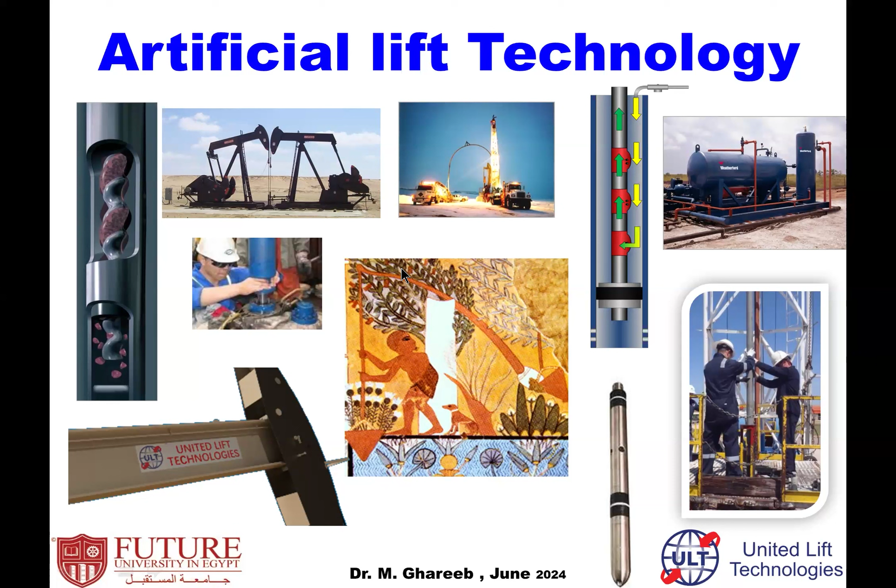So, without further ado, let's welcome Dr. Mohamed Ghareeb, who will give us a session on artificial lift technology. Dr. Mohamed has a PhD in petroleum production engineering with a specialty in artificial lift and production engineering and operation. He is currently a staff member of Future University and head of the Petroleum Technology Department of New Cairo Technological University. Meanwhile, he is global technical director of Artificial Lift Systems for United Lift Technologies.

Dr. Ghareeb is a technical and business professional with over 34 years experience in the oil and gas industry, with long experience of business development, sales, marketing, operation, teaching and applications engineering covering artificial lift design, operation, troubleshooting and optimization for major service companies like Lufkin, GE, Tundra Process Solutions, Weatherford, United Lift Technologies, and oil field operation for major operators like Eni, Agiba, GPC.

Dr. Mohamed Ghareeb's field experience includes the setup, installation, operation, and optimization of different forms of artificial lift systems in the Middle East, North Africa, Russia, Romania, Turkey, and Brunei. Over the past years, Dr. Mohamed also has played a major role in the practical training for field staff and engineers in oil and gas production engineering and well operations for different major companies in the MENA region, USA, Canada, Romania, Turkey, and the Far East. Dr. Mohamed was Society of Petroleum Engineers SPE Egyptian Section President, Program and Membership Chairperson.

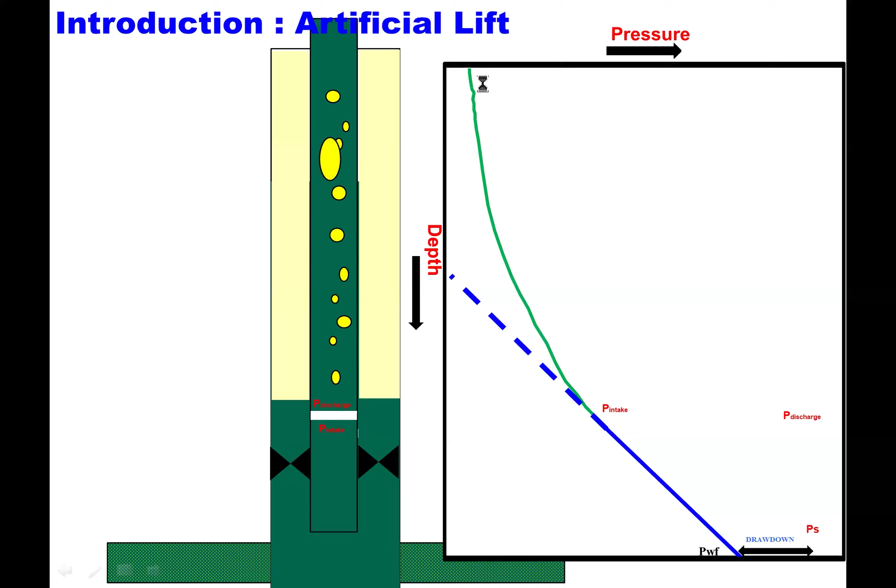What's available in the market for making this type of artificial pressure inside the wells? In all cases, as I said, there is an artificial pressure inside the well. All any artificial lift system is doing is generating artificial pressure inside the well. According to current applications worldwide and the energy source, they are divided into two categories.

One is called formation pressure assist, assisting the formation pressure. The formation pressure is low, so I'm assisting the bottom hole flowing pressure inside the well, and I'm reducing the hydrostatic head inside the well, or gas assist, whatever we have. There is no pump used in this type of artificial lift; it is just formation pressure assist or gas assist.

Plus, there are different types of what we call mechanical assist. In mechanical assist, I have to run a mechanical device inside the well. There are different techniques, either electric, hydraulic, or mechanical drive, and this can give me the target required artificial pressure inside the well.

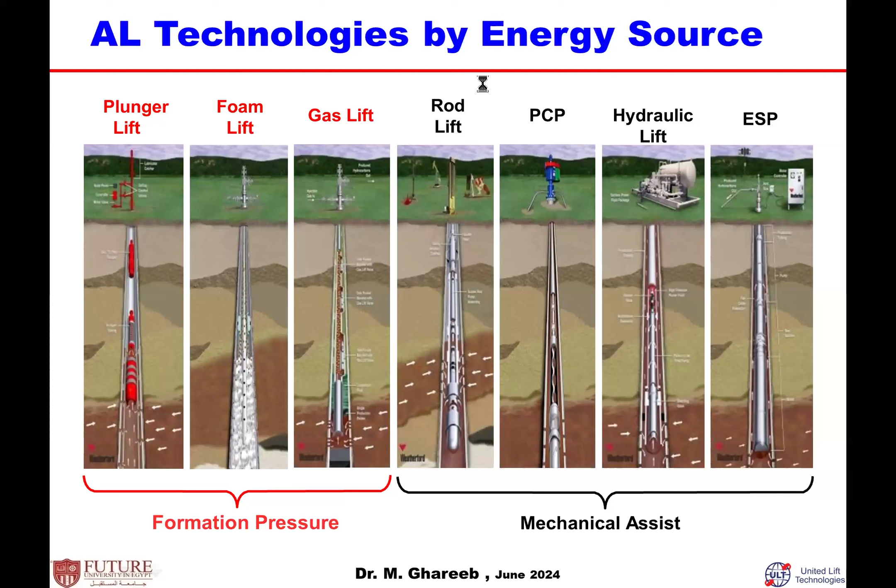For formation assist or gas assist, the market currently uses plunger lift, foam assist or foam lift, gas lift, and so on. Each one has different categories and applications. For mechanical assist, we have rod lift, PCP, and hydraulic lift; there are different types of hydraulic lift. PCP is the abbreviation for progressive cavity pumping system. Plus ESP, electrical submersible pumping system, and so on.

Then, based on what we mentioned before, to decide what type of artificial lift I must use, or which is suitable for my well, I have to know what I need from my artificial lift, what I want from the artificial lift system I have to run in the well.

Remember, when we run an artificial lift system in the well, most operators prefer to run a system for the life of the well, because changing artificial lift is not easy. It can be done, but it's not preferred. If you find a system that can run from beginning to end, that's okay. However, different types of reservoirs and wells sometimes require changing the artificial lift during the life of the well.

Then I need artificial lift to maximize production. My main target is to maximize production, and meanwhile to be flexible in production rate. Remember, there are different types of reservoirs, like water drive, gas drive, depletion drive, so production rates can change with time. Even if the well is under enhanced oil recovery or secondary recovery, the production rate can change. So I need a type of artificial lift where I can easily change the parameters to cope with changes in the well production rate.

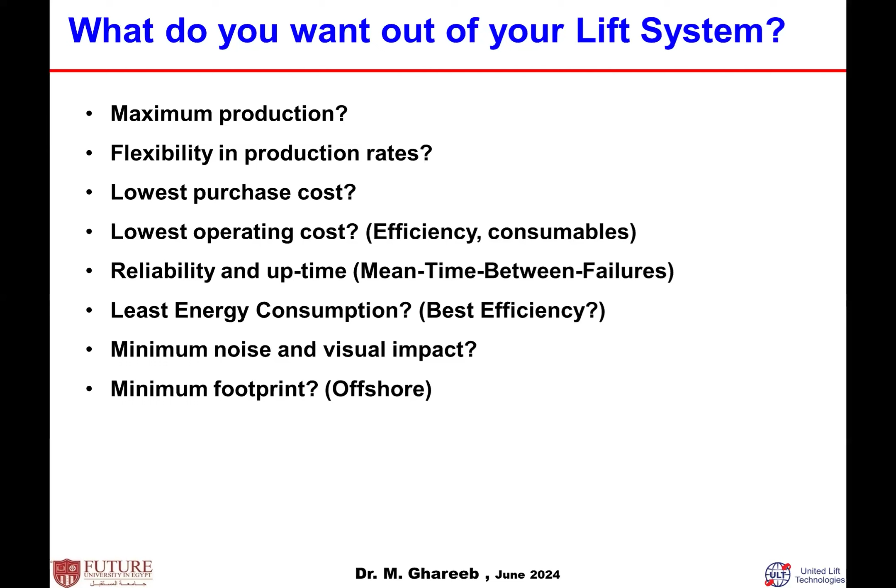This is just a general view of when I start to decide what type of artificial lift I need, what type of system I have to run, and even for the same system, what type of size, what type of configuration, and so on. I have to keep something like that in mind.

Then at the end, for artificial lift, I need to maximize my output from the artificial lift system by ensuring the equipment is producing optimally, in optimum condition, optimum efficiency, optimum cost, optimum from a safety point of view, and so on. And this can be achieved by minimizing equipment downtime. What is the downtime of this equipment per month, per day, per year, and so on?

And also to reduce intervention frequency. Interventions mean you are going to do servicing, either rigless or using a rig. And I have to minimize all that. From time to time, I should not stick with my old technology, old technique, even for the same system. For example, if I use an ESP system, most times there is some new innovative technology; I can change, I can replace, I can add it, I can improve, and so on.

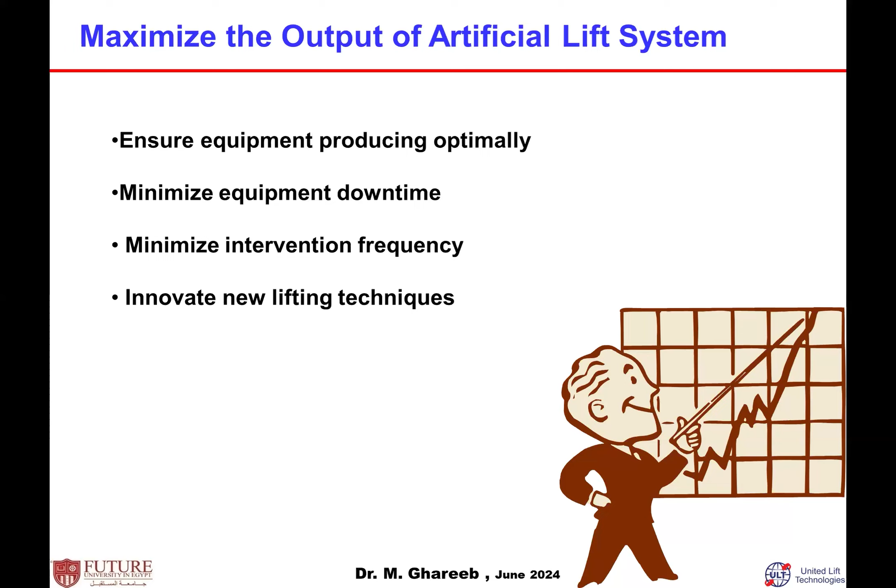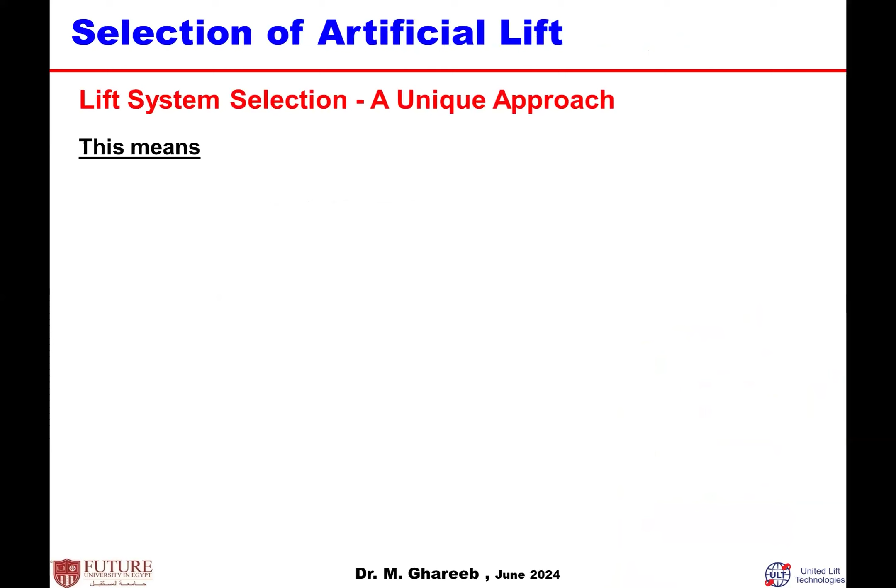There is a lot of technology, especially in the area of artificial lift, coming to the market from time to time. If there is sand and there is a problem with downhole pumps, downhole equipment, if there is gas, corrosion, and so on. That means artificial lift is a unique approach for selection. When I want to select the best or optimum type for my wells, I have to look at every aspect from the reservoir, the reservoir condition, the reservoir types, up to the facility where the flow reaches.

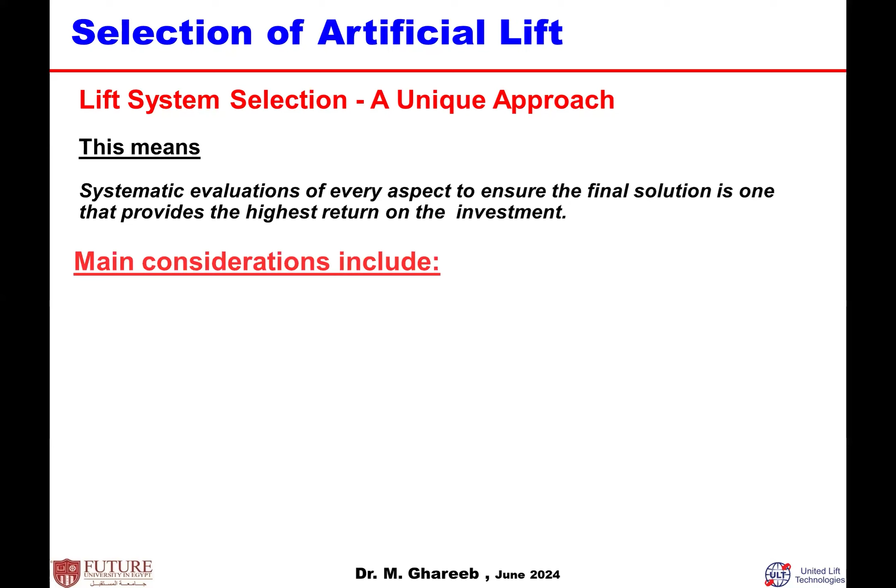Because artificial lift is used to lift flow from the bottom of the well and move it up to the facility, I have to look at all of that. Inside the wells, what type of wells: vertical wells, horizontal wells, deviated wells, and so on. Let us go quickly through some of the aspects and considerations that have to be considered.

Like reservoir parameters, I mean pressure. Is the reservoir pressure high or low? Is the reservoir pressure depleted? Is the reservoir pressure supported or not supported? What's the productivity index, PI? What's the water cut? Will the water cut increase with time? Is this reservoir water drive, weak water drive, active water drive? What's the permeability? What is the flow efficiency inside the well?

And if there is sand or a tendency to produce sand. Even for the water, sometimes initially there is a very low water cut, and with time the water cut increases, depending on how you're running your system, how you deplete downhole, how you generate the drawdown inside the well, the gas oil ratio or gas liquid ratio. We can have a gas oil ratio for the gas inside the well, and outside. So all of that is a parameter I have to consider.

I should not ignore any one of them. And also the well parameters: depths, shallow wells or deep wells. If deep wells, is it deviated wells or vertical wells? Even for deviated wells, what type of deviation, what's the dogleg severity, how is it deviated?

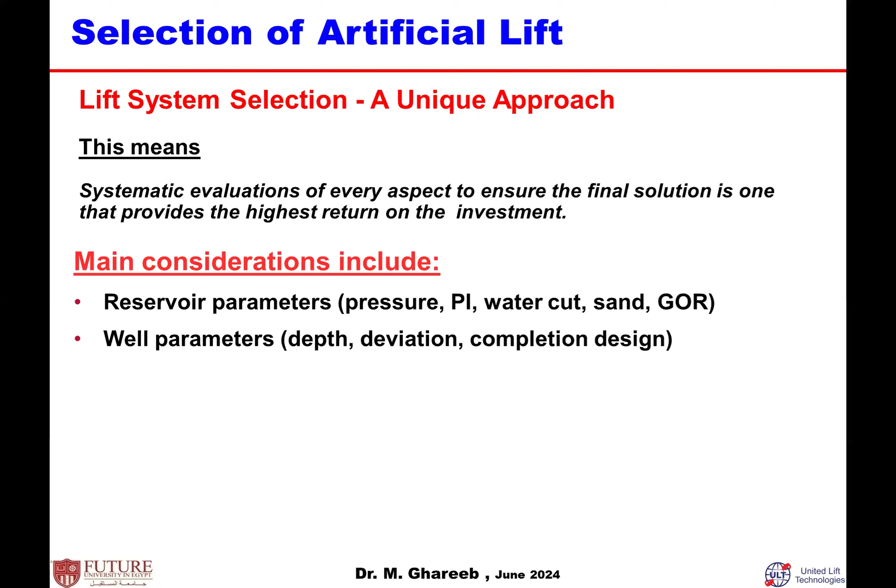What's the completion design? Sometimes I have to run a certain completion due to a certain requirement for the wells, for some condition, and so on. What is the completion I have? Location: is it onshore or offshore? Cost: we like to look at the cost, especially operating cost. Capital, yes, but especially operating cost, because this artificial lift is running for the life of the well. Reliability of the system: is the system reliable?

The main important factor is really the local experience. Sometimes when we go to some area, some fields, we find the majority of the wells producing with a certain type of artificial lift. For example, I saw some companies near to each other, just a border between them. One uses ESP, the other uses rod lift. Why? Because both types of artificial lift can lift the wells with good efficiency and good operating cost.

But the operators have good experience in some area. What is the experience in this area? Someone has very good experience in rod lift systems, so he prefers to use rod lift because if something happens, he knows the source. Someone else prefers to use, for example, ESP or PCP and so on.